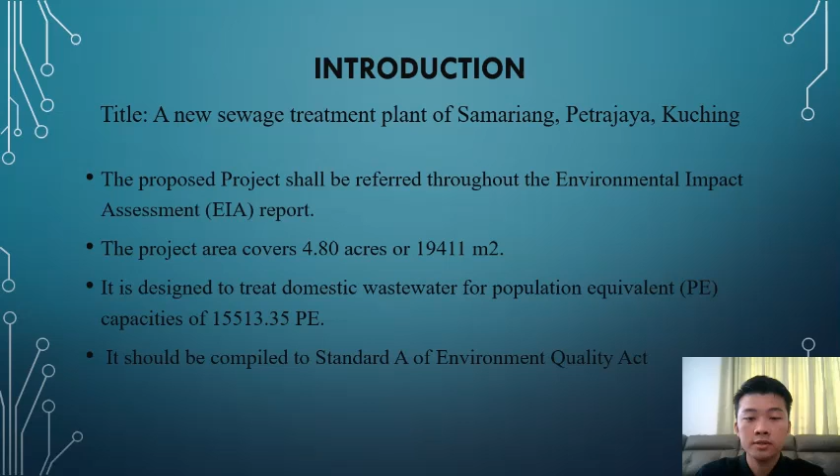Next is a legal requirement of project. The Environmental Quality Act (EQA) of 1974 has been adopted as Malaysia's principal law instrument for environmental management. The Environmental Impact Assessment (EIA) report is required under the EQA 1974 Act 127.

Environmental Impact Assessment (EIA) is a legal requirement in Malaysia, and this sewage treatment plant development falls under the category of prescribed operation that must be submitted to the Director General of the Department of Environment (DOE) for permission. The EIA report was prepared by a qualified person registered with the DOE and was based on the DOE's new Environmental Impact Assessment (EIA) criteria.

The EIA guidelines in Malaysia were produced to help in understanding the objective of EIA, the technique for conducting EIA studies, and the guidelines for writing EIA reports. It also includes provisions for including methods to prevent, lessen, or control undesirable environmental impacts, as well as a more detailed description of each stage of the proposed prescribed activities during its design, construction, and operation.

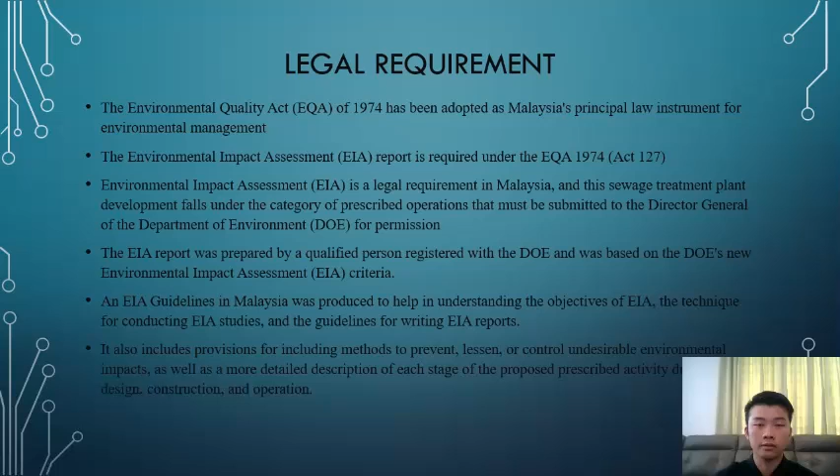Objective and scope of project. The purpose of the project is to convey the findings of the EIA report that was conducted to achieve the following objective: to present project needs and justification, to describe the existing environmental conditions surrounding the proposed site, to describe the sewage water treatment STP technology and layout design, as well as the wastewater treatment process,

to describe the key activities involved in the sewage treatment plant's operation phase, to identify and assess the potential environmental implications that the sewage treatment plant's operations could have, to recommend appropriate pollution control and mitigation methods to reduce potential consequences during the sewage treatment plant's operation period, to explain the conclusion and recommendation of sewage treatment plant STP project.

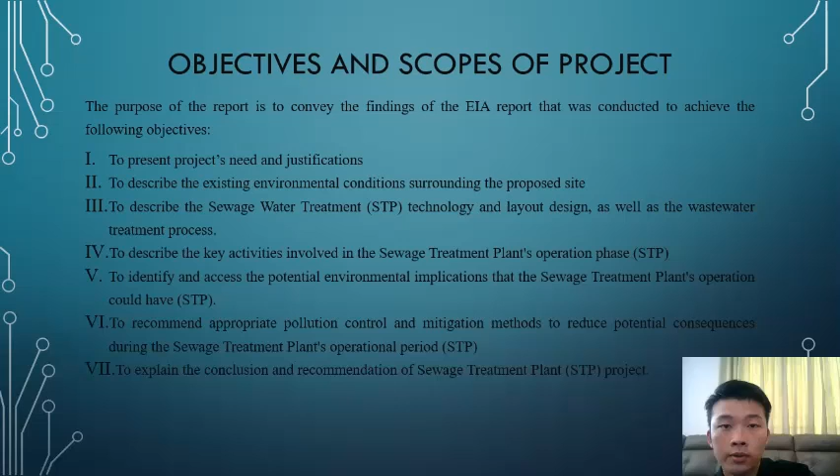Statement of need. The population equivalent PE calculation for a new sewage treatment plant STP has been proposed to be around 15513.35 PE. Hence, development of a sewage treatment plant with a very high efficiency is required. Within the new STP boundaries, the STP is designed to remove pollutants from wastewater and generate ecologically clean water through physical, chemical, and biological methods before being used on land. An extended aeration activated sludge system as the new sewage treatment plant STP.

The design, calculation, and plans have been designed complying with the guidelines of Malaysian Sewage Industry Guidelines (MSIG) Volume 3 and 4 issued by National Water Services Commission (SPAN). The final discharge from STP should meet Standard A of the Environmental Quality Sewage Regulations 2009 as required by DOE.

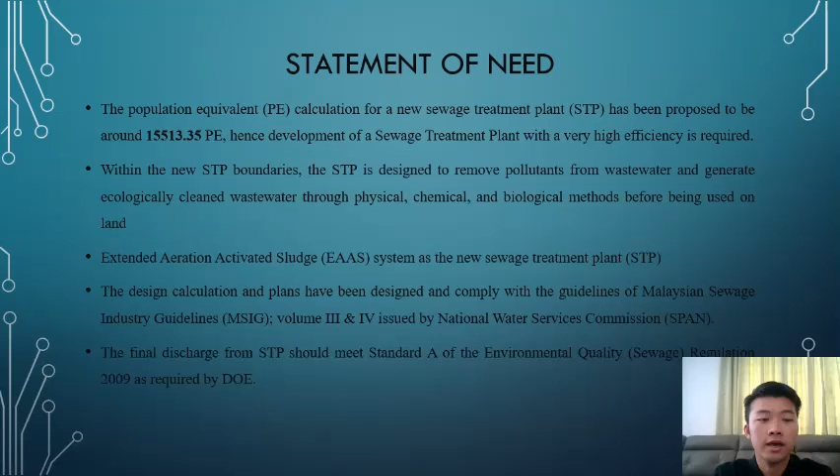Project justification. The location of the project is in a sub-development area that will undoubtedly have beneficial implications on population expansion, economic prospects, and future demand for residential, commercial, and industrial properties. This development is expected to result in the creation of better infrastructure, including new road connections and social amenities, that would immediately improve the quality of life for the existing regional community.

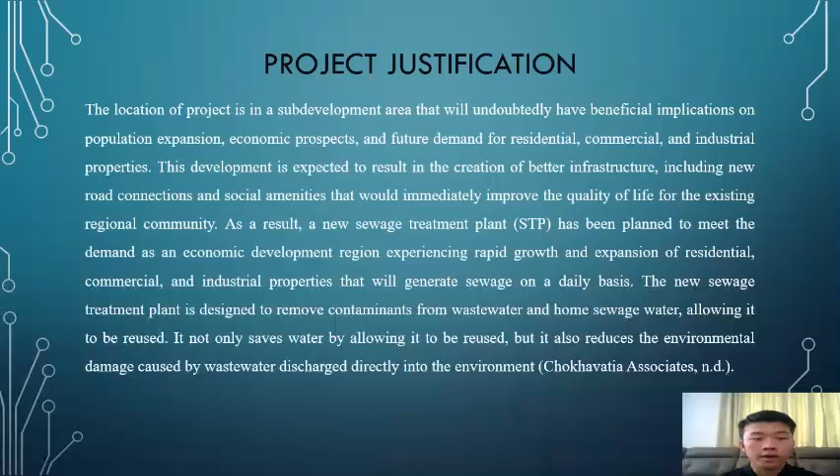As a result, a new sewage treatment plant (STP) has been planned to meet the demand as an economic development region experiencing rapid growth and rapid expansion of residential, commercial, and industrial properties that will generate sewage on a daily basis. The new sewage treatment plant is designed to remove contaminants from wastewater and home sewage water, allowing it to be reused. It is not only saving water by allowing it to be reused, but it also reduces the environmental damage caused by wastewater discharged directly into the environment.

Now we move on to the site options. For this site, we decided to choose the area that consists of residential, commercial, and industrial. Some criteria that we need to consider are environmental accessibility, social and economic value, social impacts and contribution to the economy, land use compatibility, and relevance to government policies and development strategies.

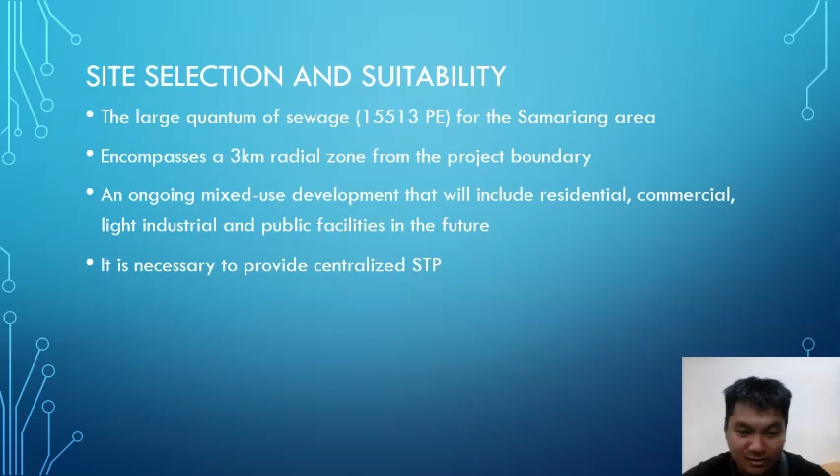Next, we move on to the site selection and suitability. The site that we choose has a large quantum of sewage, which contains 15,513 PE for the Samariang area. It encompasses a 3 km radius zone from the project boundary. The site is an ongoing mixed-use development that will include residential, commercial, light industrial, and public facilities in the future. So it is necessary to provide a centralized STP.

Next, we move on to the technology options. According to Indah Water in 2021, in Malaysia, primary treatment systems such as public septic tanks and Imhoff tanks and unreliable, low-cost secondary treatment systems such as oxidation tanks are widely used. The Imhoff tank is a simple sewage treatment plant that requires very little operational skill. There is no mechanical equipment maintenance required.

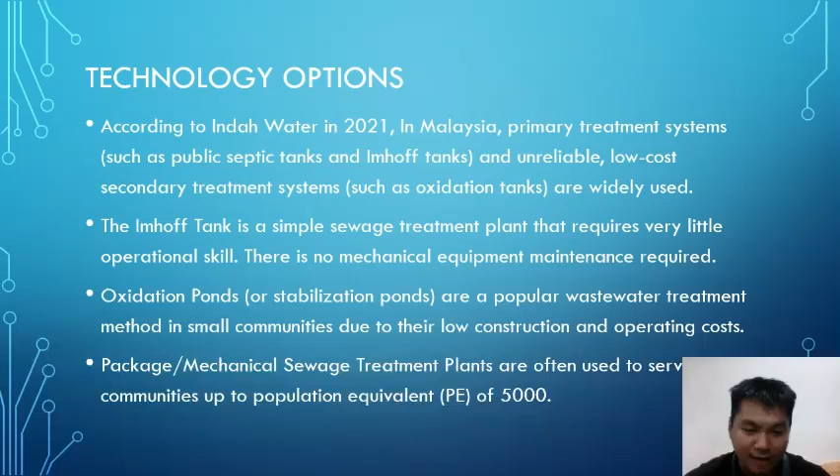And move on to the oxidation ponds, also called stabilization ponds. It is a popular wastewater treatment method in small communities due to their low construction and operating costs. And then we move on to the package, or we can call it mechanical sewage treatment plants. It is often used to serve communities up to a population equivalent of 5,000.

Next, we move on to the project options. In this project, we are choosing the EAAS, which is Extended Aerated Activated Sludge System, for this new sewage treatment plant. It is because the EAAS system has the advantage that sludge has a longer life and higher durability, making the process stable and easy to operate.

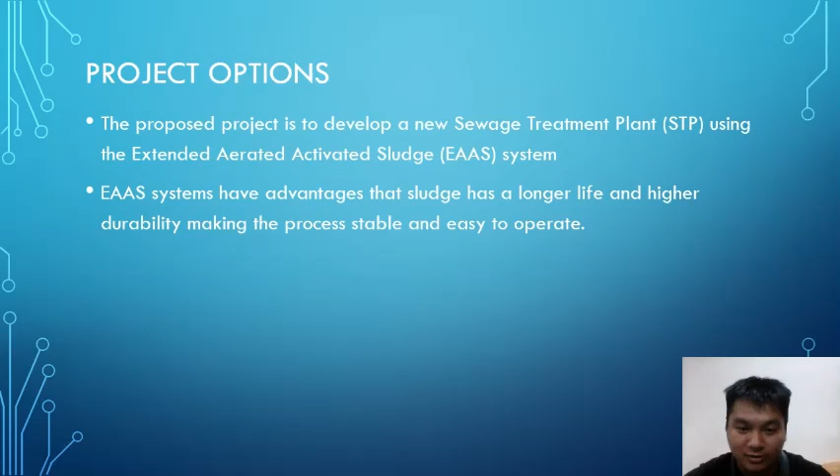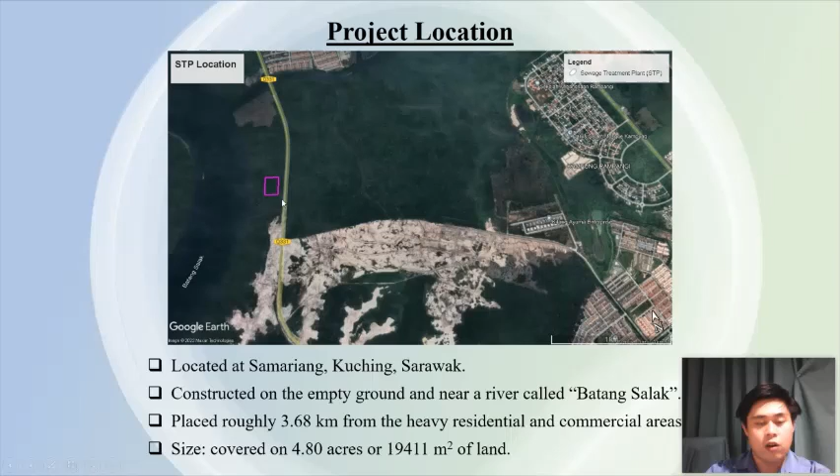Now we'll move to the project description and components. First of all, it's about the project location. The proposed sewage treatment plant is located at Samariang, Kuching, Sarawak, as shown in the figure here, and it is constructed on empty ground near a river called Batang Salak. It is placed roughly 3.68 km from the heavy residential and commercial areas, and its size covers 4.8 acres or 19,411 square meters of land.

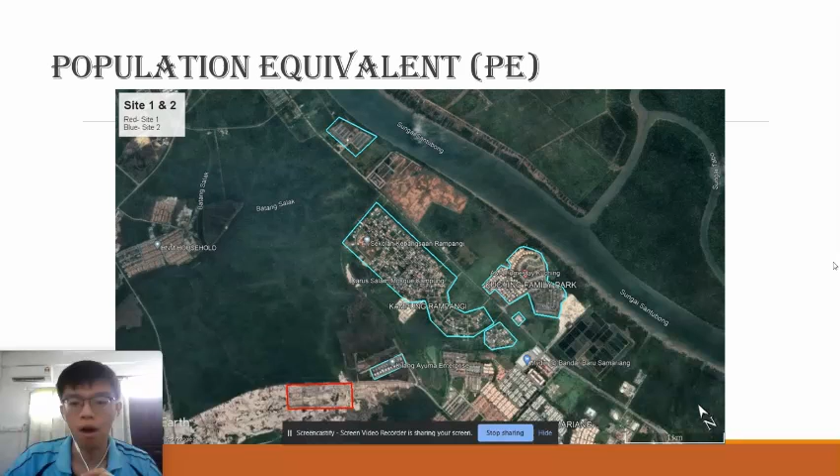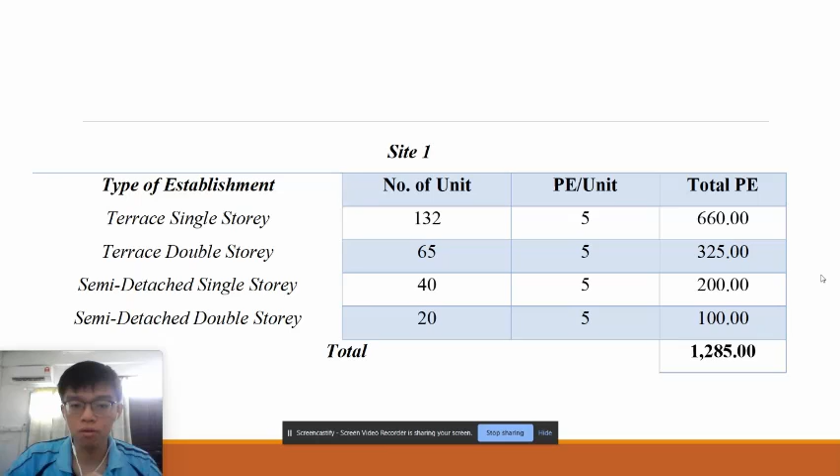For this part, I'm going to talk about the population equivalent, PE. As shown in the figure above, we have divided the site into two parts, site 1, the red one, and site 2, the blue one. Site 1 is the ongoing development area, while site 2 is the existing area. This table shows the detailed calculation of total PE for site 1. As you can see from the table, site 1 has a total PE of about 1.3K.

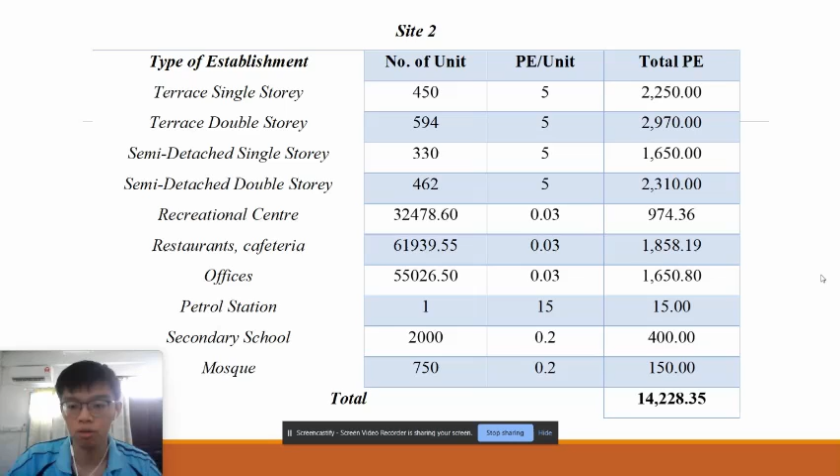Then this is the table showing the total PE for site 2. From the table, site 2 has a total PE of about 14.2K. Site 1 has an area of about 31 acres, while site 2 has an area of about 307.52 acres. Based on the two tables above, the total population equivalent for the site area covered by the new proposed sewage treatment plant is about 15.5K.

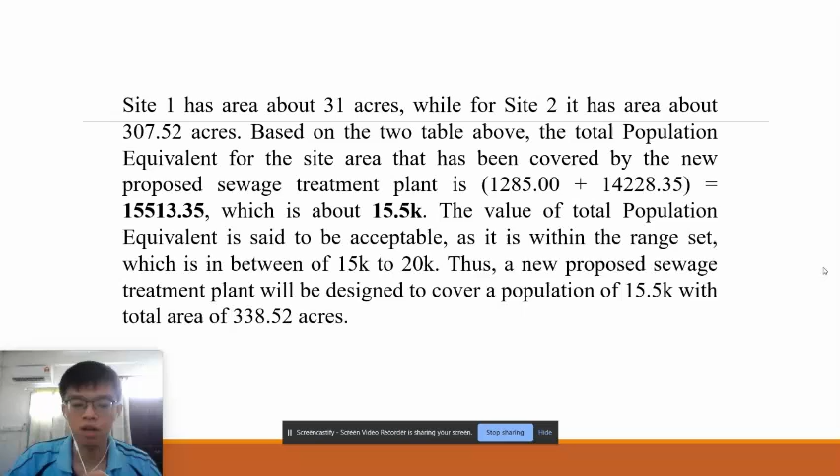The value of total population equivalent is said to be acceptable, as it is within the range set, which is between 15K to 20K. Thus, the new proposed sewage treatment plant will be designed to cover a population of 15.5K within the total area of 338.52 acres. Now I will explain the process description of the proposed sewage treatment plant.

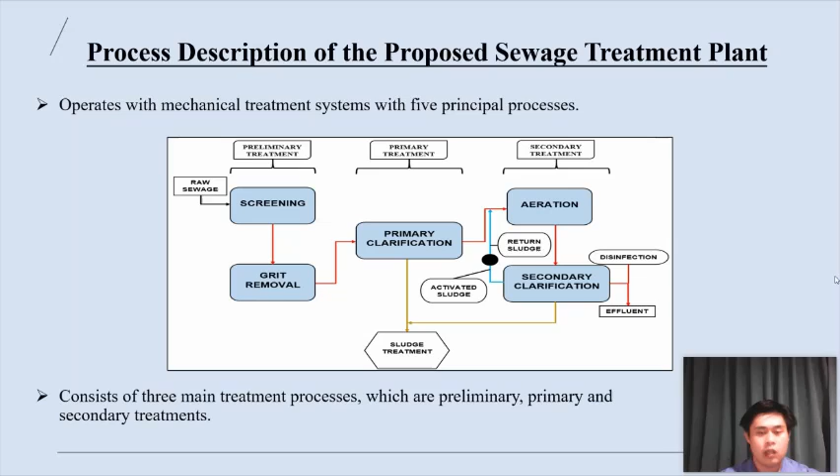The sewage treatment plant operates with a mechanical treatment system with 5 principal processes. The figure here illustrates the sewage treatment operation flow. As can be seen, the plant consists of 3 main treatment processes, which are preliminary, primary, and secondary treatments. The first step is screening. The raw sewage first goes through screening, where more sizable waste solids are separated from the sewage to avoid damage to the following equipment.

The following process is grit removal, which is a gravity separation technique of microparticles with a specific gravity higher than organic matter, to minimize blockage from grit deposition in channels. Next is the primary clarification, known as the sedimentation process, where the flow velocity is lower, and sludge will settle at the bottom of the tank. Also, scums will develop and float on the sewage surface. Both the sludge and scums are removed for disposal.

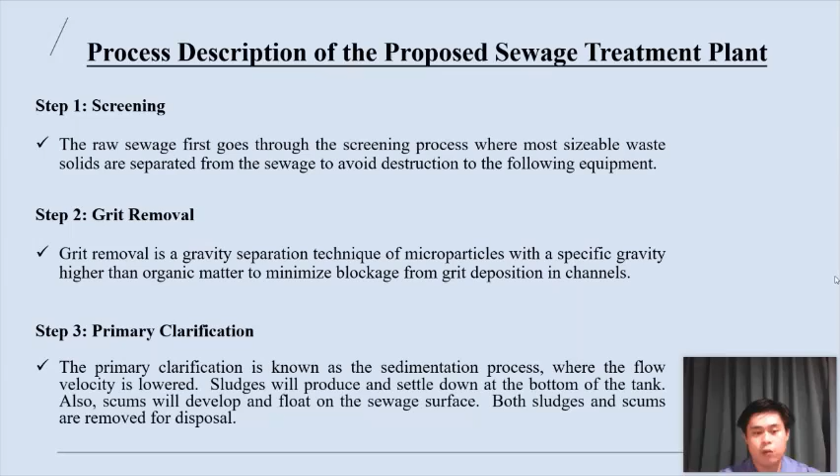Then is the secondary treatment, often referred to as biological treatment. The activated sludge process is employed, by which oxygen is supplied to remove biodegradable organic substances. The activated sludge process requires both aeration and secondary clarification. The aeration process helps to mix the oxygen supply with sewage adequately.

The function of secondary clarification is similar to primary clarification, but the waste product formed is known as activated sludge. The return sludge pump will convey a portion of this activated sludge to the aeration process to enhance bacterial concentration. Then the excess is discarded for sludge treatment. After that, the effluent is disinfected with chlorine and eventually can be discharged into the waterways.

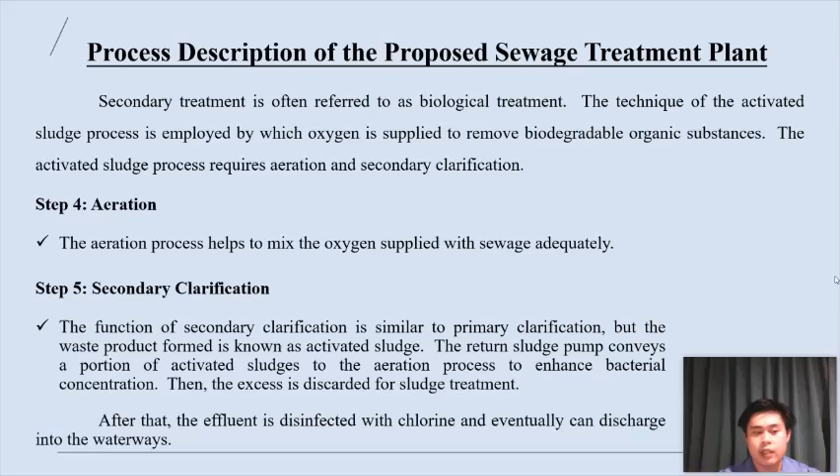I'm Jackie. For this part, I'm going to talk about the existing environment. The first is the physico-chemical environment. There are many parts under the physico-chemical environment, where the first is the land use.

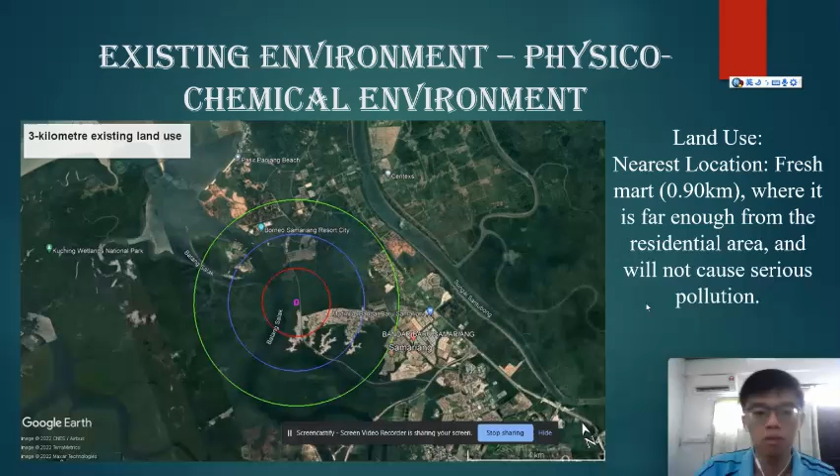From the satellite image shown in the slide, the nearest location found is the Fresh mart, which is 0.9 km apart, where it is far enough from the residential area and will not cause serious pollution. The residential area and commercial area start to appear from a 1 to 2 km radius.

The next part is the topography part. The entire proposed site can be subdivided into slope steepness categories. For our proposed STP, it used a land area of 4.8 acres. All of the land area is categorized under class 1, which is the 0 to 5 degree slope steepness class, which can be said to be gently to moderately sloping.

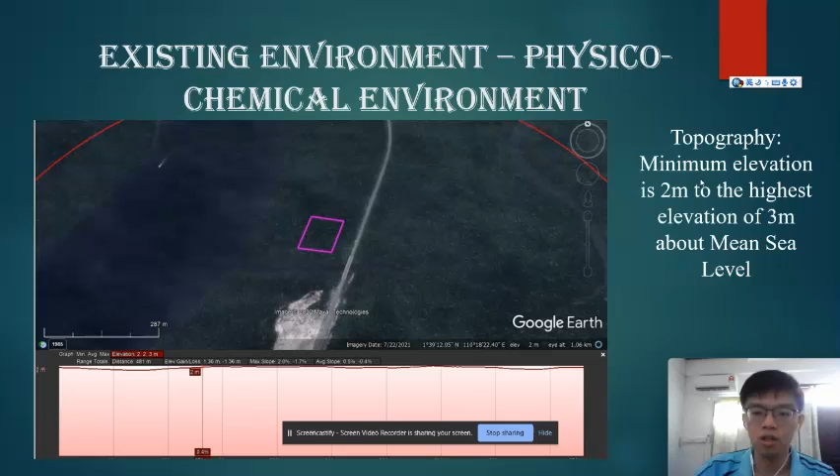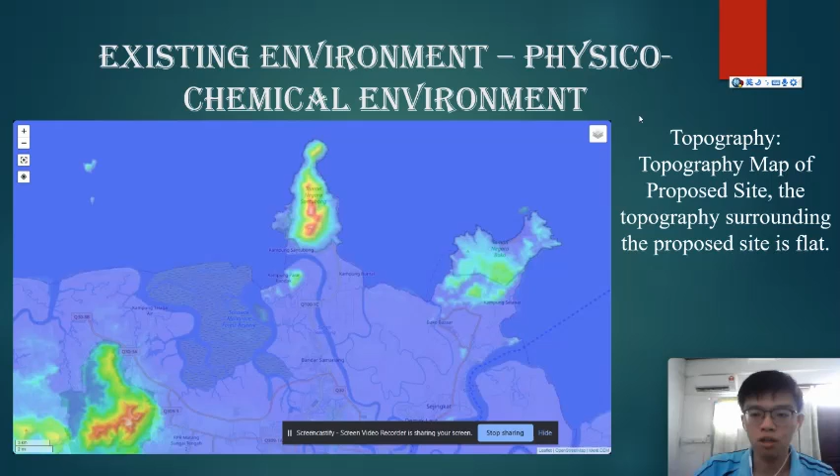This figure shows the elevation of the proposed STP, which we get from Google Earth Pro. From the figure, the minimum elevation is 2 meters to the highest elevation of 3 meters above mean sea level. So this is the topography map of the proposed site. As we can see, the topography surrounding the proposed site is flat.

The next part is the geology and soil. Based on the geological map shown in the slide, there are no valuable mineral resources detected both within the proposed site and within a 3 km radius from the proposed site.

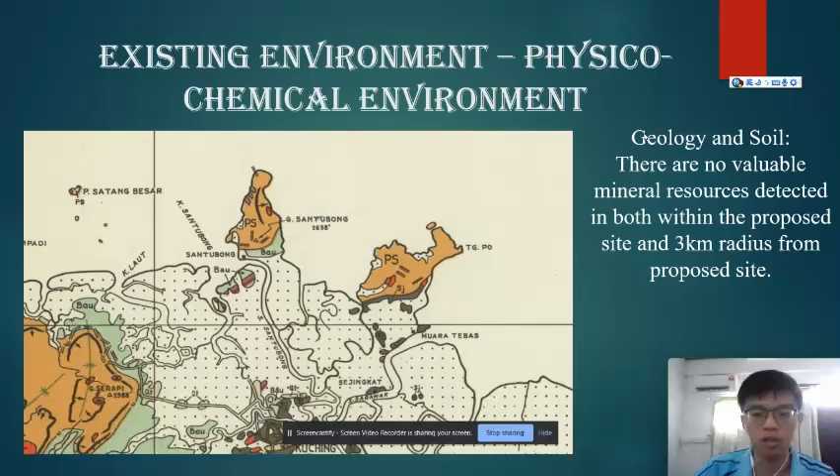So for climate and meteorology, the proposed region generally experiences an equatorial type of climate, which is warm and humid weather all year round. Malaysia faces two monsoon wind seasons, which are the southwest monsoon from late May to September and the northeast monsoon from October to March.

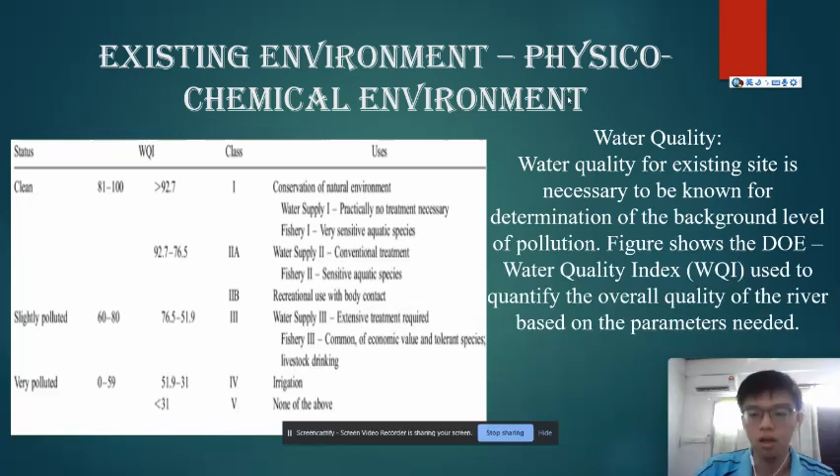The next part is the water quality. Water quality for the existing site is necessary to be known for determination of the background level of pollution. The figure shows the DOE water quality index used to quantify the overall quality of the river based on the parameters needed. So this figure shows the national water quality standards for Malaysia.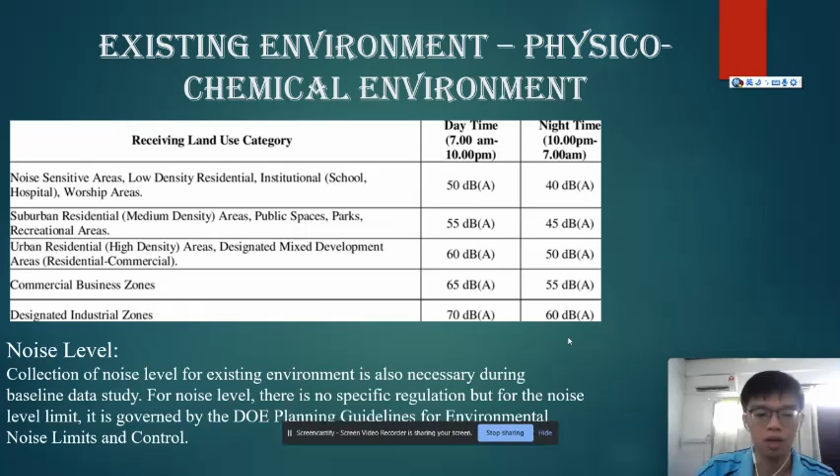So for the noise level, collection of noise level for the existing environment is also necessary during the baseline study. For noise level, there is no specific regulation, but the noise level limit is governed by the DOE planning guidelines for environmental noise limits and control, as shown in the figure above.

So we are now going into the next part, which is the biological environment. The proposed site is located near an urban area, with presence of flora but insignificant presence of fauna. The proposed site is selected to be an empty area with forests and near the riverside.

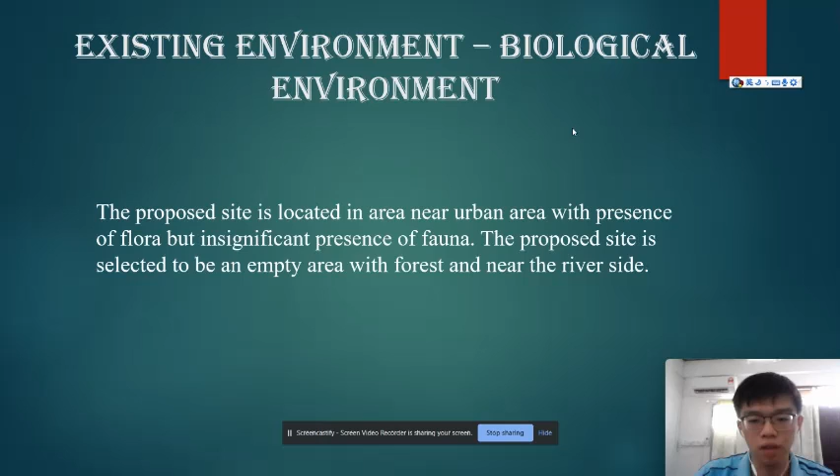Next is the social, economic, and human environment. The proposed site chosen is currently undeveloped and still full of trees. The proposed site may be developed into a residential or commercial area in the future as the population increases day by day. And there are 3 schools nearby the area.

From site observation, the local population can be categorized mainly into the middle income category, judging from the type of surrounding properties, industrial area, and business activities taking place. The sources of income for the local population can be prejudged as mainly wage earning, working in the industrial and commercial sectors, such as schools, factories, restaurants, and cafeterias. The proposed development will need the supply of utilities for the consumption of its residential area. So this is all for the existing environment.

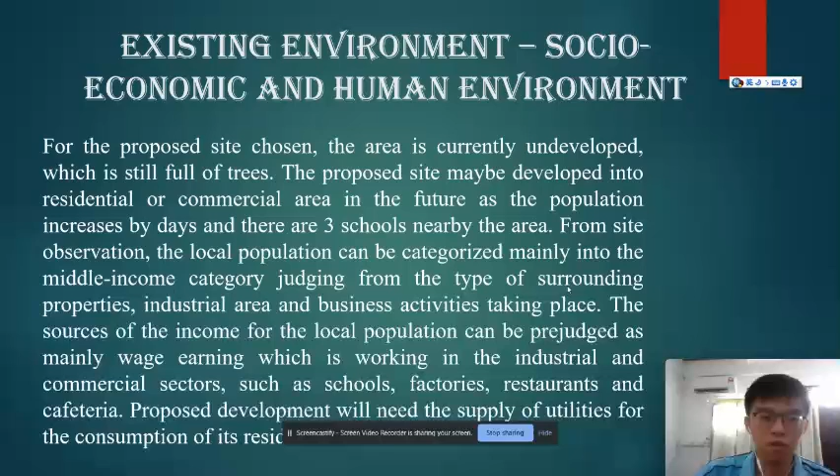Evaluation of impacts. One of the first impacts of the STP is odor and air pollution. Gases such as sulfur dioxide and nitrogen dioxide will be released from activities such as transportation and construction and cause air pollution. Also, the sewage consists of a high concentration of sulfide that causes a release of bad odors and creates a corrosive environment. The gas from the sewage also does not get purified before being released due to poor design and will cause odors and air pollution.

Next, the impact is soil erosion. Excessive quantities of sediments are derived from soil erosion as runoff builds up rapidly to a peak and then diminishes. Also, the increased sedimentation from soil erosion will cause water pollution and clog waterways.

Also, one of the impacts is health. STP can cause mosquito breeding and diseases transmitted by mosquitoes such as dengue. Also, the inhalation of gases such as hydrogen sulfide can cause irritation to the eyes and respiratory system. The sewage effluent also contains pathogenic bacteria and viruses that affect health. The noise and vibration from activities and machinery also cause noise pollution and irritation.

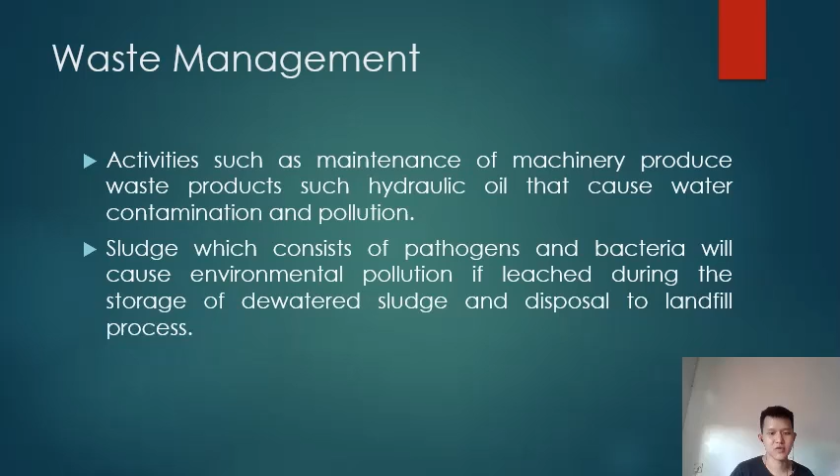Furthermore, one of the impacts is waste management. Activities such as maintenance of machinery produce waste products such as hydraulic oil that cause water contamination and pollution. The sludge, which consists of pathogens and bacteria, will cause environmental pollution if leached during the storage of dewatered sludge and the disposal to landfill process.

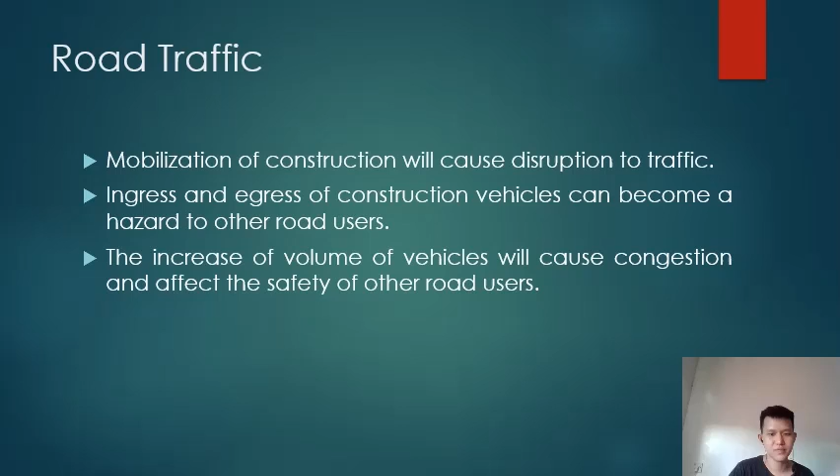Also, road traffic. The mobilization of construction will cause disruption to traffic. Furthermore, ingress and egress of construction vehicles can become a hazard to other road users. Furthermore, the increased volume of vehicles will cause congestion and affect the safety of other road users.

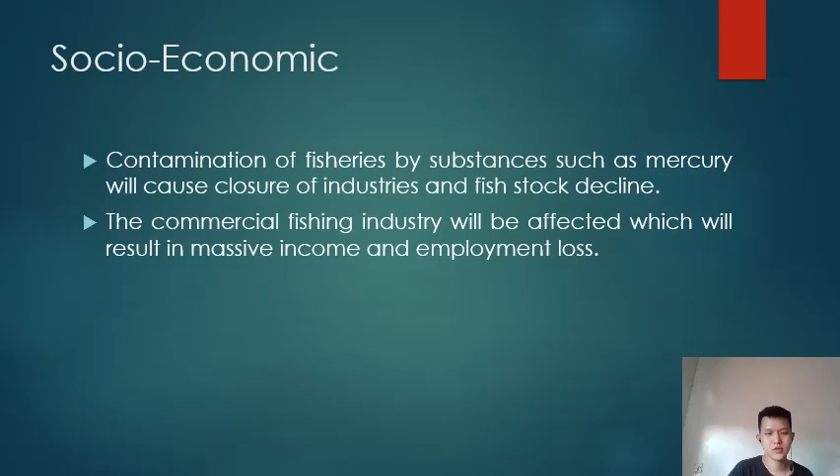Also, one of the impacts is socio-economic. Contamination of fisheries by substances such as mercury will cause closure of industries and fish stock decline. The commercial fishing industry will be affected, which will result in massive income and employment loss.

Then, quantitative risk. Accidents happen when the STP is not properly maintained. System and process failures will cause the treatment process to be inefficient. Therefore, poorly treated wastewater will cause pollution to the surrounding environment.

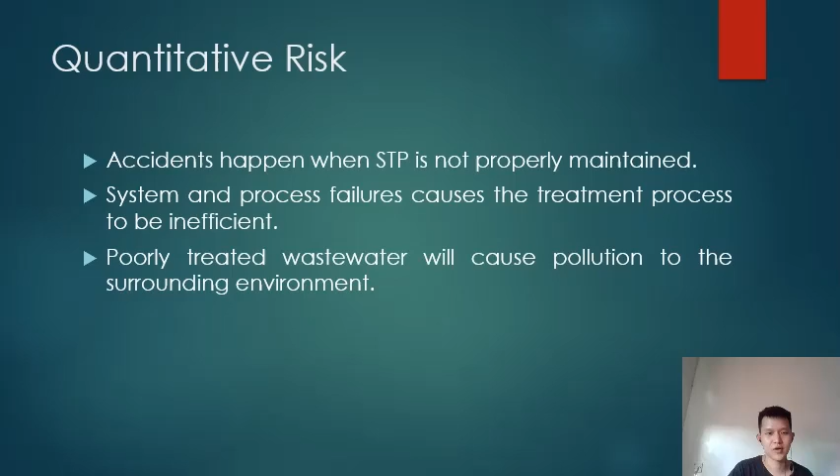So next, the mitigation measures for the impacts caused by the STP. The first one is proper design. The STP must be designed to meet Standard A of the Environmental Quality (Sewage) Regulations 2009. This means that it must include an odor removal system to avoid odor and air pollution. It must also include UV disinfection units instead of traditional chlorine-based disinfectants to avoid environmental pollution. In addition, it must include enclosed boxes for equipment and machinery to avoid noise pollution.

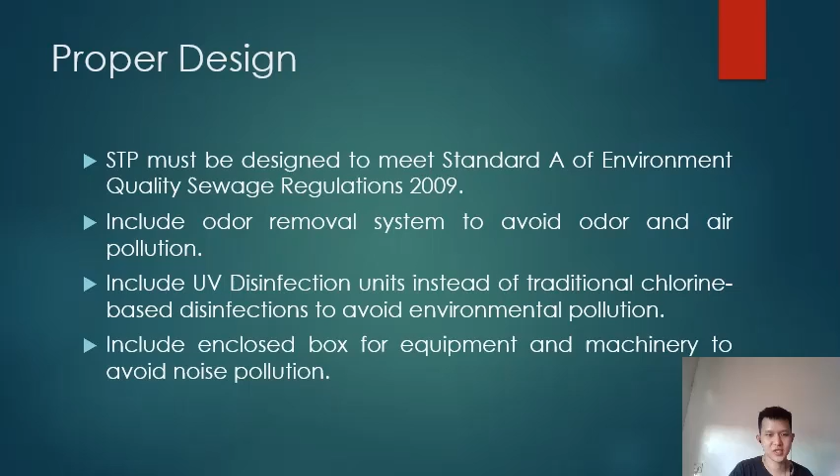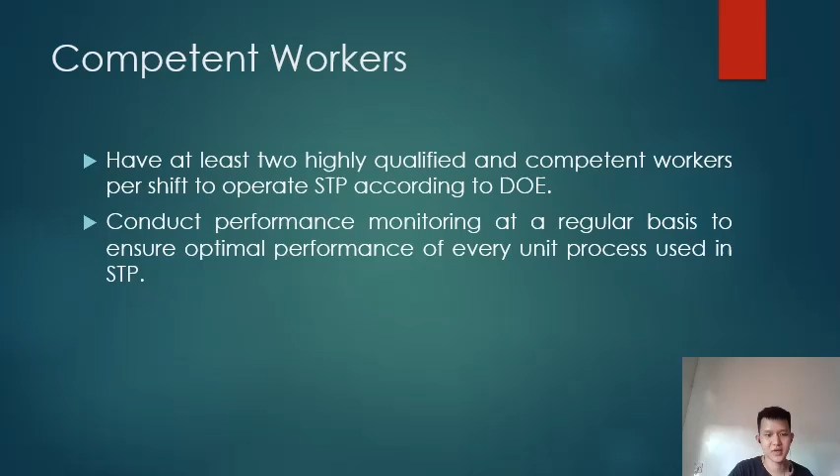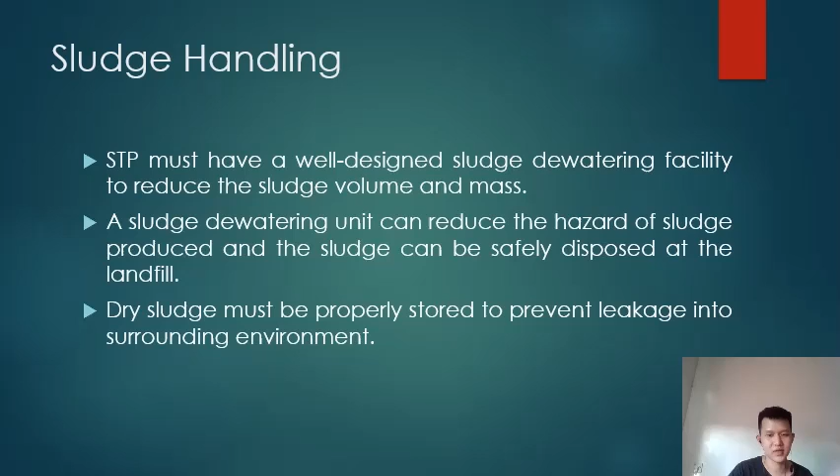Next, the mitigation measure is sludge handling. The STP must have a well-designed sludge dewatering facility to reduce the sludge volume and mass. A sludge dewatering unit can reduce the hazard of sludge produced, and the sludge can be safely disposed of at the landfill. Also, the dry sludge must be properly stored to prevent any leakage into the surrounding environment.

Now we move on to the last part, which is the conclusion. Based on the entitled project, a new sewage treatment plant of Samariang Petrajaya Kuching, the extended aeration activated sludge (EAAS) system will be used as the new sewage treatment plant. The population equivalent (PE) for the new sewage treatment plant has been proposed to be around 15,513 PE.

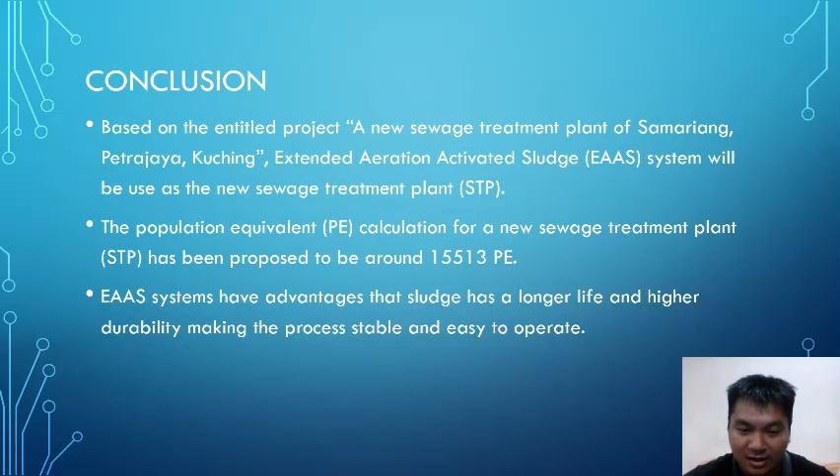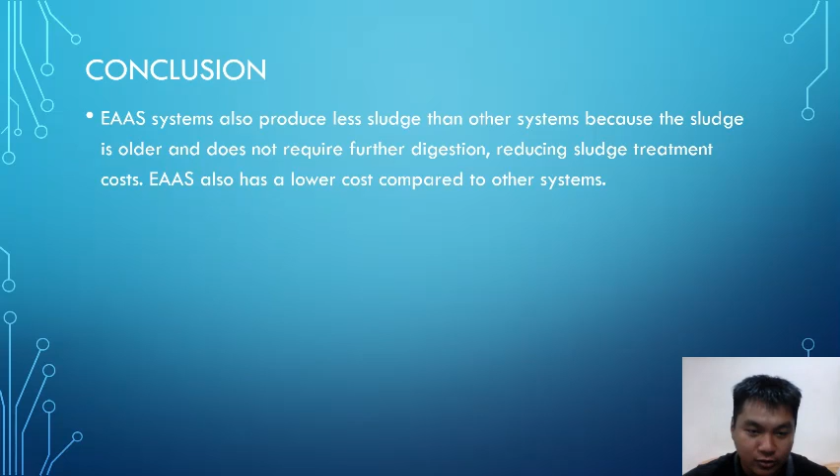The EAAS system has the advantage that sludge has a longer life and higher durability, making the process stable and easy to operate. Lastly, the EAAS system also produces less sludge than other systems because the sludge is older and does not require further digestion, reducing sludge treatment costs. EAAS also has a lower cost compared to other systems.